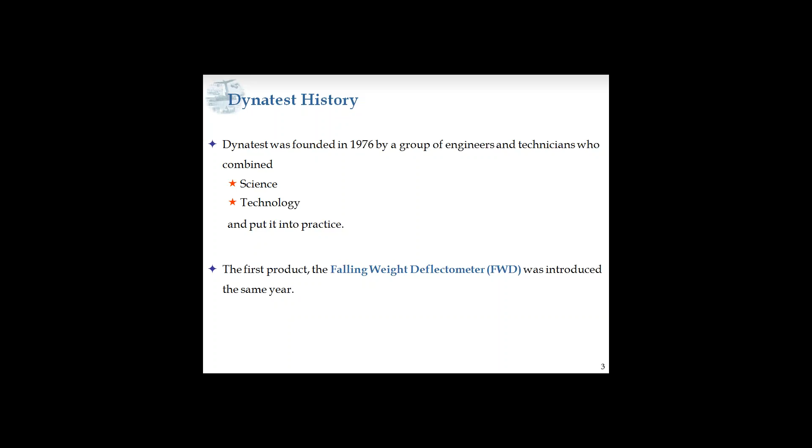It was manufacturing and selling falling weight deflectometers. That's where the company started, so it's been around a long time. Then it moved into different product lines, but the company is really based on non-destructive testing of pavements.

We are now global, and FWDs are on every continent around the world. We just opened up offices in Colombia, Peru, Chile, and we have several in North America. We're consolidating our production to Alpharetta, just north of Atlanta. We have offices in Denmark, now in France, Italy, and agents that sell equipment for us around the globe.

The focus of the talk is very basic stuff. I know you're all masters, PhD students, professors, with a gazillion years of experience, but Dynatest is interested in measuring pavement response, both structural and functional. For structural response, we're measuring deflections, strains, calculating stresses. We're doing that with our falling weight deflectometers and our heavy vehicle simulators.

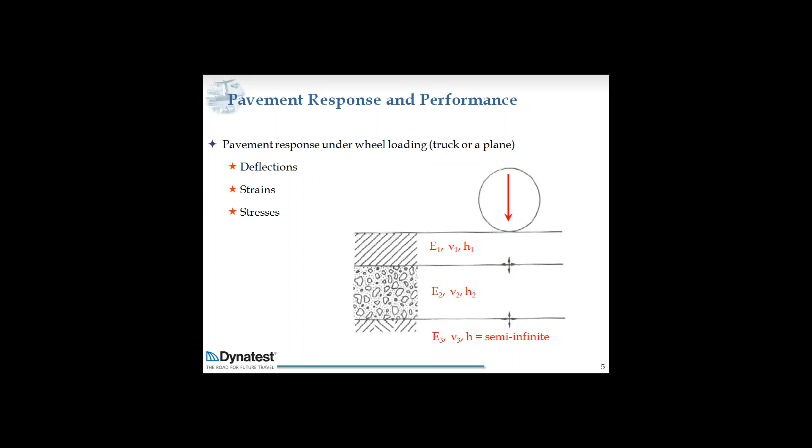For roadway pavements, falling weight deflectometers. For airfield pavements, bigger structures, heavyweight deflectometers; same thing, just bigger forces applied. Errol, you got to play with the lightweight deflectometer, the LWD that we had. So we're measuring pavement responses and correlating the response to performance: cracking, rutting, roughness, all that great stuff.

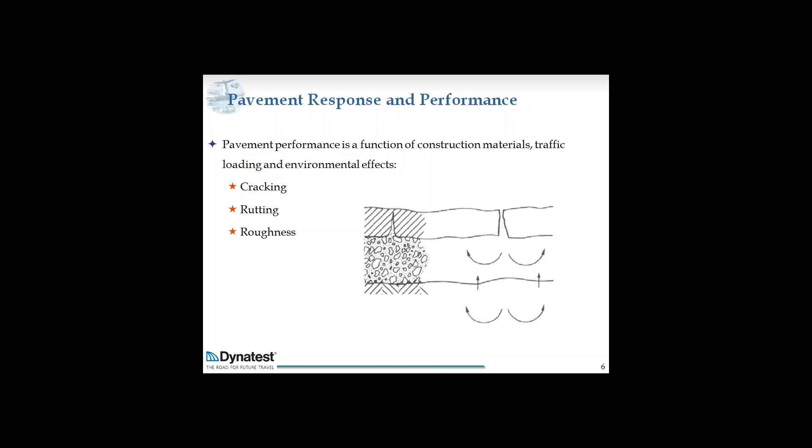From a functional perspective, looking at the surface of the pavement, we also test for friction properties with our friction equipment. We're also testing rutting, transverse profile, as well as longitudinal profile, IRI, roughness, that type of data. So the FWD measures structural performance, which eventually leads to functional performance issues as well.

APT historically has been performed using these big devices, heavy vehicle simulators or ATLaS machines, MLS; they produce these machines all over the place, with different ways of full-scale testing of pavements. These are expensive devices. Caltrans has a couple, Florida DOT has one, Waterways Experiment Station down in Vicksburg has one. These are $2 million plus systems. The one at the FAA is a $5.3 million device. These are very big investments.

Doing accelerated pavement testing, it's not just buying the equipment. You have to have a program, hire people to build test sections, get funding, and you put this big trailer on top of the pavement and run a wheel back and forth. You can control the lateral drift to get some wander, change the load, and put a profiler on the surface to measure permanent deformations.

While testing, you can also go out with a falling weight deflectometer, drop a load, measure deflection, see how deflections change over time, and calculate layer stiffnesses. You can also measure deflections in situ using multi-depth deflection sensors. So this is a very expensive investment, and getting a program off the ground is hard. We've sold 18 of these globally, but less than half of them have real vibrant programs.

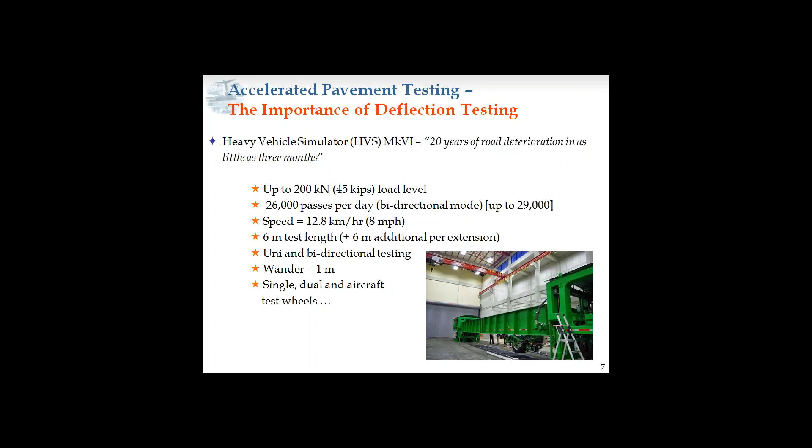So here's how you use the thing. It's got a wheel that goes back and forth, measures deflections, everything like that. You're probably all familiar with this. Why are we interested in doing this? Why are we doing all this testing? If we look at, I like this plot here. This is one of the few graphs that I like to show up here.

If we look at initial deflections when we do testing on a pavement, okay, so x-axis, number of load repetitions. How many times the wheel has been put across, or one load repetition, okay? So we're starting off at 0, going up to 2 million load repetitions, okay?

If we look at the elastic deflections under 9 kips of force at different times after the pavement has been subjected to those loads, you can see that D naught, initial deflection, increases to about 320% of D naught. In this test, it was around 650,000 repetitions.

Okay, but the deflections have gone from 320% D naught to 410% D naught. So there's not that much increase in the deflections. However, you're putting on a whole bunch more load repetitions. Okay, so what is that saying? Where's most of the damage to the pavement occurring? Well, structurally, it's occurring within this area up here, but then it's kind of hovering in okay shape through here. But right here is where you're seeing that initial increase in damage, and then things kind of even out a little bit.

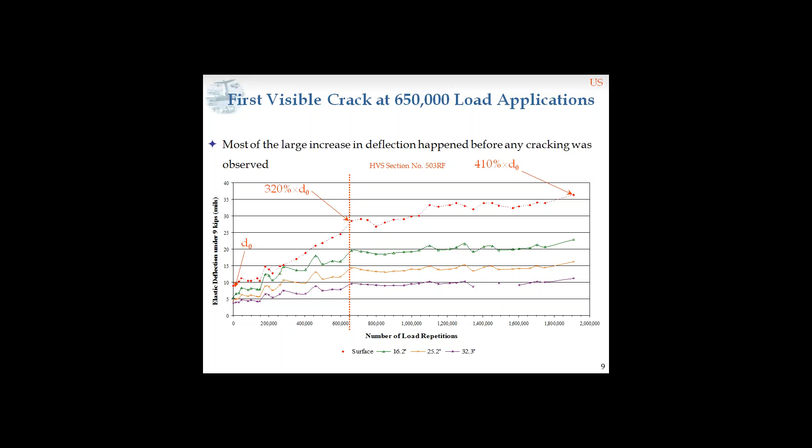So again, you can't bring an HVS out there to test every single pavement, so what can we do with a falling weight deflectometer? Well, here's the traditional Dynatest FWD. The setup is very, very simple. You have a mass back here, a bunch of weights. You guys will see these out in the field. They're just these little gray slabs. You can put as many weights on there as you can fit without messing up the machine. But put them on the back.

We raise the weights up in the air. We drop them. Okay, they come down. There's a load plate on the pavement surface. The weights bounce off of some buffers that transmit the load into the plate, and then from that, what are we going to measure? We have these little sensors on the ground. Does anybody know what those little sensors are? It's not one type of sensor, there are a couple different types of sensors that FWDs use.

Geophones. Okay, what do geophones measure? What are geophones measuring? Yeah, not deflections. We get deflections from them, huh?

You're integrating to get deflections. You're integrating from what to get to position? Velocity. What's before velocity? We're measuring acceleration. Integrate acceleration, get velocity, exactly. And then you get position, right? So we're measuring the accelerations. Some of these devices actually do measure velocity. And some other manufacturers, not Dynatest, will measure deflection directly. They'll measure position off of those. But we don't do that.

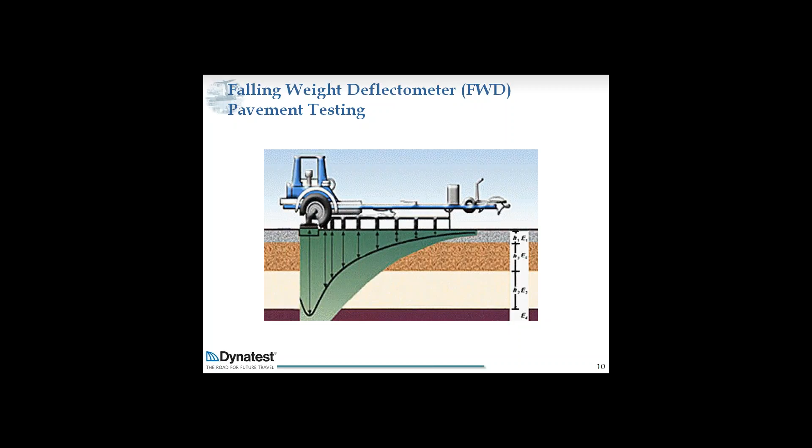You want to know the pavement layer thicknesses as well. So you do some coring, and that's why GPR is becoming popular now, because in order to get a good indication of what those layer stiffnesses are, you want to know the layer thicknesses, and it's expensive and dangerous to do coring all the time. So a lot of technology goes into finding out how stiff each layer is.

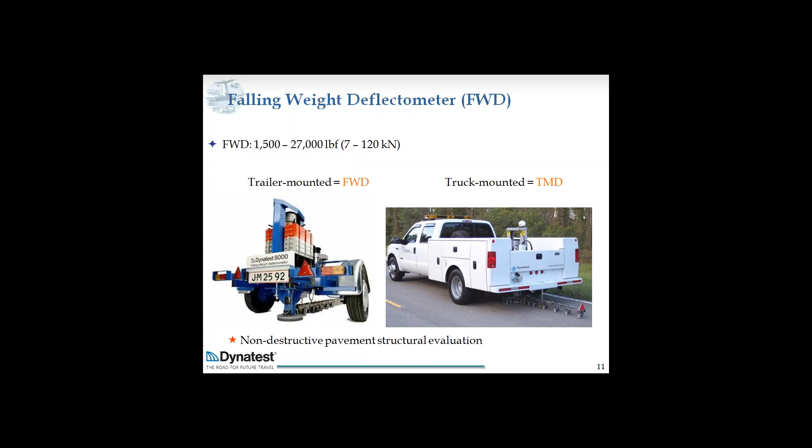These are the old systems. We have our trailer mounted FWD here. Again, we manufacture these assemblies in Denmark, so you'll see a lot of European license plates on these things. You'll see something that looks similar to this out in the parking lot. But since backing up a trailer causes jackknifing issues, and not a lot of people can do it well, myself included, we also put these in trucks so they're a lot more movable. Okay, so these are the traditional ones, and these were hydraulic systems. These are very different than the FastFWD, which we'll get to in a second.

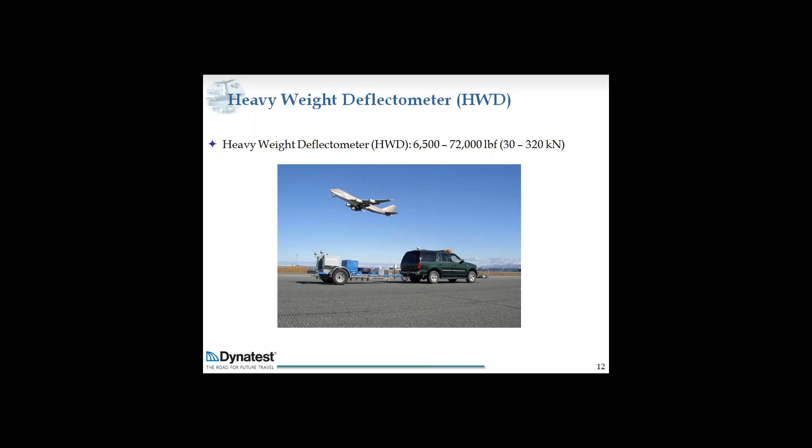But you see, this is a traditional heavyweight deflectometer. We have a huge hydraulic system, and this is for testing airfield pavements, a big hydraulic system to lift the big load package up in the back that we drop. I think this is out in Colorado. Might be Denver. Yeah, a lot of hydraulics back there. Hydraulics are always fun to work on when something goes wrong in the field. You got oil spilling all over the place and people are screaming at you. It's always a nightmare.

But the FastFWD, we've gotten rid of the entire hydraulic system. There are no more hydraulics with the latest falling weight deflectometer. It's a linear motor. It's 100% electrical. You can run them off a second alternator on a van, or you can run them off a generator. We have both hooked up out there. It's kind of cool. Super quiet. Do you run a drive screw? Yes, that's exactly what it is. Good thing we patented that.

So we have a DMI. Believe it or not, we're controlling the height of the load package with a DMI that's rotated horizontally, measuring rotations of the drive screw. And we know exactly where the load package is, so we get extremely precise measurements. It operates like a robot. It's incredibly accurate. So this comes up, there's a drive screw in here, and then we bring it up and we release it.

I really want us to get to the point where we can drive it, so we're getting more than gravity pulling down on that. If we could drive that and then control the load pulse with the driving force down, that's next year. But right now we just let it go. So this setup is really nice. It's very quiet.

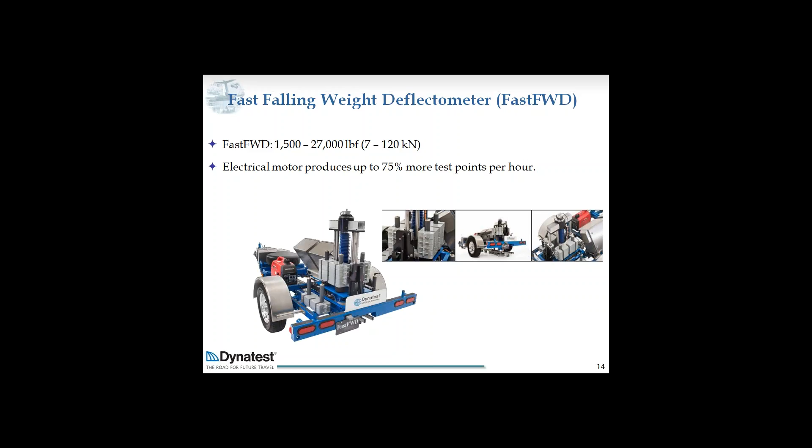One of the big things when you're doing this type of testing is how much time you're out there doing testing. So you want to limit basically any disruption to traffic. So you want to be on and off the road as quickly as possible, not just so you don't get hit, but so traffic or somebody doesn't drive into you. So on the roadway side, we're looking at being able to collect the same amount of data in a significantly shorter period of time. Conversely, if we want to get more resolution in data, or if we want to get a lot more testing done, we can do that in a shorter period of time as well. So there's some safety aspects to this thing which are kind of nice.

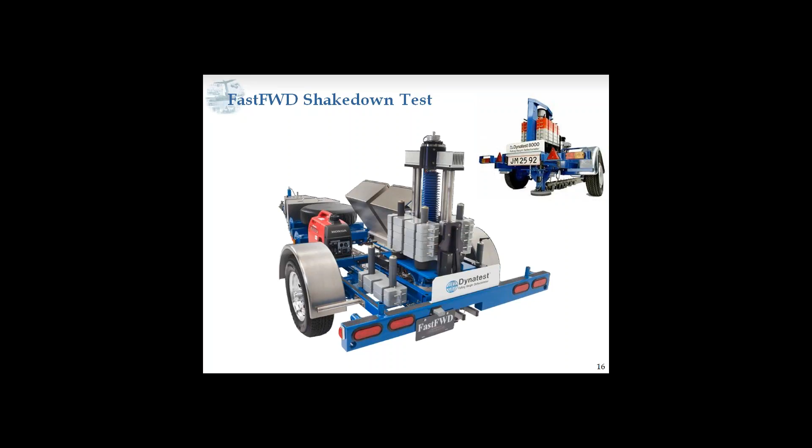Anyway, so here's the sub-assembly for the FASTFWD. So this is the screw and then the weight package, and we have these little locks that come out here, and you'll see all this stuff up close. Whoever wants to operate it, we'll let you push the button and start stuff. But it looks very similar to the original, to this FWD. You can see though that we had the hydraulic system running through here, and on either side here we had a support. Now we just have one centerpiece running through here.

All of these fins up here, that's to cool this electric motor that's up top. And this thing gets really, really hot. Okay? And that's one of the things we're still doing, field testing this to make sure that it doesn't blow up or melt down out in the field. When you take this to Arizona on a summer day, testing out there, it can be a bit of an issue. So we have a little umbrella that we put over it to keep it nice and cool, and a little fan. So anyway, here's what happened.

I said the consulting division were guinea pigs, okay? So when we get a new product and we draw it all up, we get it built, then we bring it out in the field and we start beating away on it. This guy, we took the FASTFWD and we literally strapped it down. We started testing. First, we didn't have it tied down.

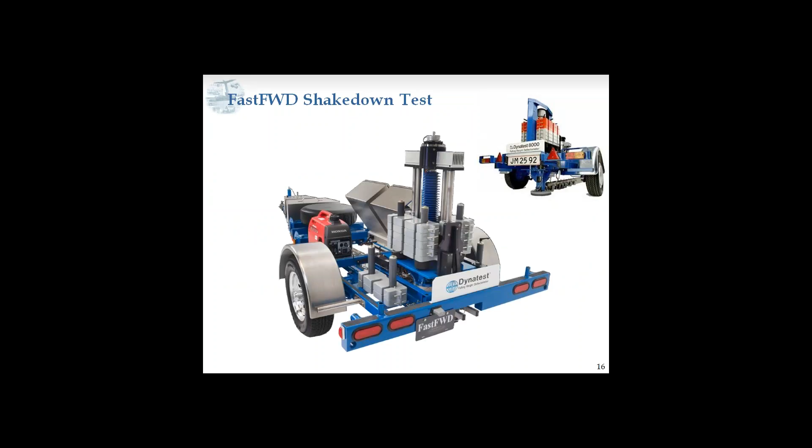And we started testing the same area, that same little piece of asphalt. We didn't even know what we had it on. We didn't start this off as a pavement testing project. It was an equipment testing project. But we noticed we're getting these deflections and deformations under the load plate. Like, what the heck is going on? And we're like, maybe we should measure these things.

So we start going out. We got a little rig with a laser profile, and we started doing some measurements. We're like, wow, we're actually watching the pavement deform. We're getting deformations out of this thing. It's happening really, really quickly. It's just going boom, boom, boom, boom, all day long.

And the first prototype, the first time that we were testing this, that little motor up top kept smoking, so we had to stop every 100 drops, I think. We had to stop and blow on it a little bit and then start testing again. And while that's going on, we start measuring some deformations.

And then some of you guys may know Per Ullidtz over in Denmark. Per is working with us still. He helped us develop CalME, California's version of the mechanistic empirical design guide. He came over and he's looking at this. He's like, wow, hey, this is kind of cool.

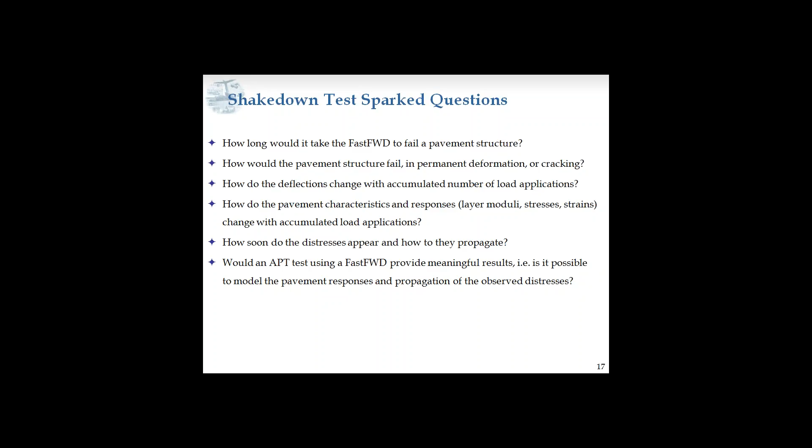So we started getting some of these questions, like how do distresses appear? All these things had been addressed by APT testing to some degree, but never with respect to an FWD. So we started thinking, wow, this is kind of APT testing. So we did 3 tests. One was not really a test. Test 1 was just a shakedown of the equipment, making sure it doesn't blow up. But we observed some stuff going on with the surface of the pavement. That led to tests 2 and 3.

We have a new production facility in Denmark, just outside of Copenhagen, a big warehouse, and beautiful concrete floor and everything, and they go in there with saws and they cut out the concrete floor and they put in a 5 meter by 3 meter asphalt test section. Okay, right smack in the middle of the warehouse. Oh, just broke my heart.

But they go in there, they put the fast FWD down there and they just start running it. Okay, and test 2, we did 96,600 drops at various load levels throughout the testing. I don't want to get into too many details. I can't spill the beans on all this stuff because we do have a TRB paper that we're doing on this stuff. So you will be able to get the full results and everything at TRB this year or next year. Started recording permanent deformations, and we even set up control points to measure outside of the influence of the FWD, of the fast FWD testing.

We did a set of 96,600 drops on the floor, and then I think, did they build a second test area? No, they just moved over a little bit. It just moved over a little bit. Okay. So, and then we did another test with 60,000 drops.

Okay, the graphs that I'm about to show you, do not read too much into these. They look all like, whoa, wow, that's really cool. Okay, don't believe it yet. These are very early results, and be suspicious. And let's just put it this way: they're going to be challenged. Okay, Per Ullidtz, we sat down. He started doing some models. He used some very simple models for determining permanent deformation based off of number of load applications. Very simple models. Okay, this is the first graph we saw.

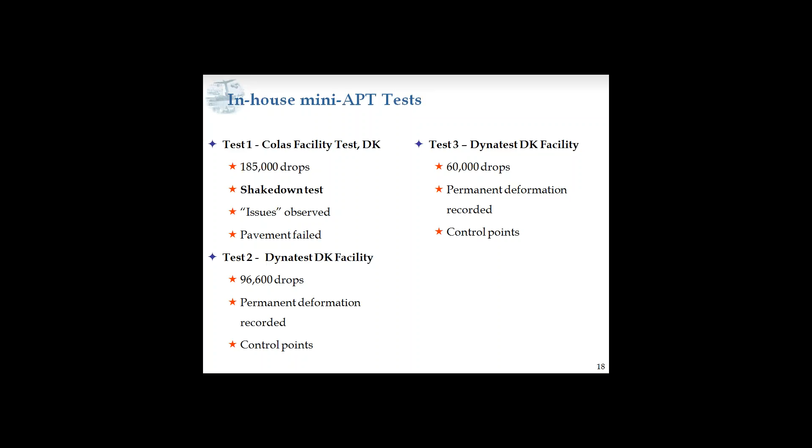So this was a DTU model for measuring permanent deformation that he calibrated, or he made some assumptions with, and this was based off the test section. This was the shakedown test. We didn't know that much about it. We knew it was 100 millimeters of asphalt, and then it was some sort of granular material. It was done in the middle of winter. The average temperature was ranging between 0 degrees Celsius and 4 degrees Celsius. It was not a controlled experiment or anything. It's terrible. However, he does a simple little model like this.

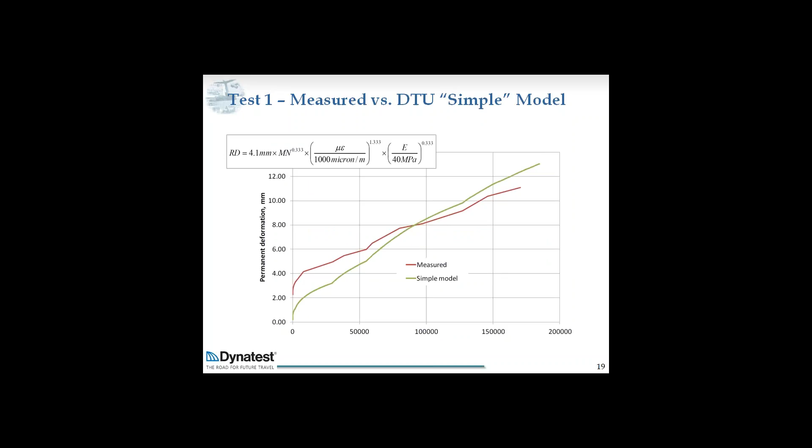Then this was test one. This was the one that was not designed. We didn't know what we were getting into with this. Test two, we start doing a little bit more design. We know what asphalt section is there. We have some idea of what the properties of the asphalt structure are. And then we start back calculating. So as we're going through, we're doing the tests, we're recording, of course, the deflections with the fast FWD, and then we're using our software.

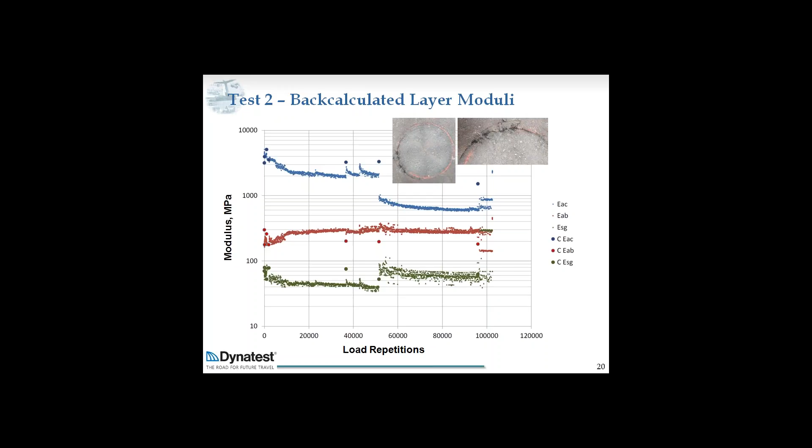So yeah, we're starting to see some interesting things with this. I'm trying to remember, do we know what the rate of testing was? How long it took them to get the 96,000? I don't know if we put that in. It was probably a month and a half, 2 months. Yeah, something like that. And they couldn't operate it all day because there's a condo building right next door, and it's really noisy. They're not happy at all with this.

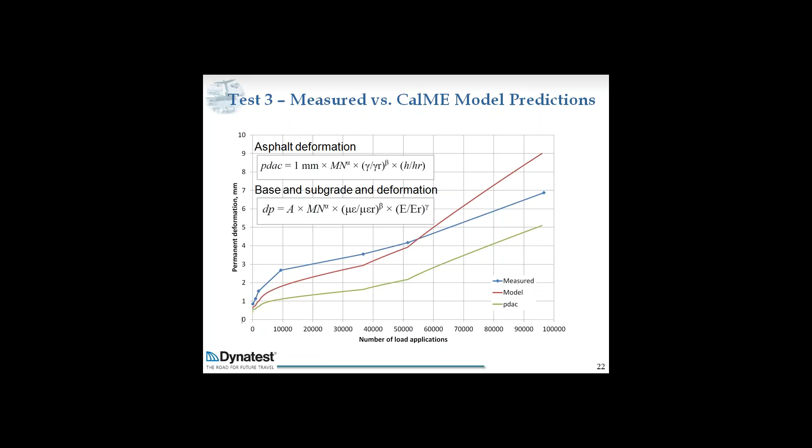And we're moving to start experimenting a little bit more with this internally. We're intrigued by what we might be able to do with this, where might this be applicable, and how might this be used in a practical way out in the field. You put a little Quonset hut over one of these things on a job. It's not that hard to envision where you might be able to use this, okay?

So conclusions, I wouldn't even call them conclusions. I'd just say it's still at an observational stage with all this work. But we can apply a lot of load repetitions really quickly with this, okay? That's a pretty decent rate of load application, even for APT testing. When you think about how many load passes you can get running an ATLaS or even an HVS, you're doing this very quickly, okay? We saw it fail in permanent deformation.

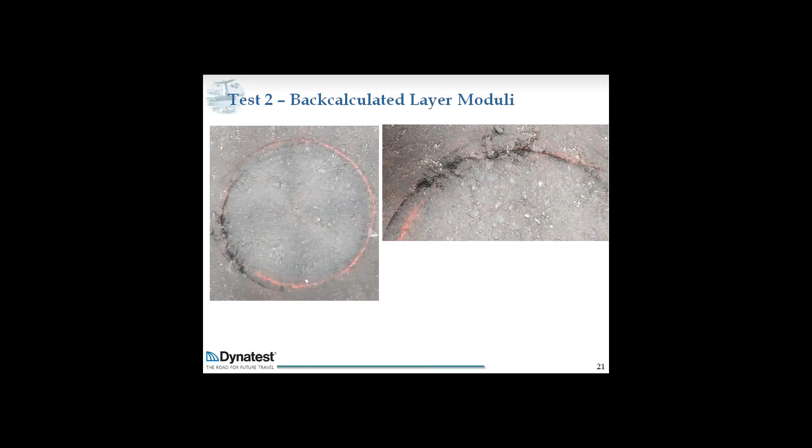We're not quite sure what to make of the crack. One of the guys said that he observed a crack in here somewhere. I don't think so, but there might be some cracking within the test area. The modulus values are performing as you'd expect, but there are some limitations. Having that concentrated load in the same place and just beating the heck out of it, that's not very realistic. It creates some issues with the data, so we need to maybe rethink that a little bit.

But it's kind of intriguing. We didn't expect to see this. We weren't looking for this. We just observed this and then went down this path.

So I think we're looking internally within Dynatest. We have our own R&D group. We have our consulting, our equipment, our service, and then our research and development divisions within the company. And so there's a lot of interplay amongst the consultants and the equipment group, and we all kind of make up the R&D team. But we're looking for ideas and, you know, where might this go?

You know, what might be the next best? What could we do with this? How could we investigate this more? And looking for insights from all you smart people who know a lot about pavements, and see where this might go in the future.

So I want to keep it very brief. I think we're at about 40 minutes with the presentation right now. I want to open it up to questions, but I also want to get you guys out in the field so you can see this thing in action. But at this point, what do you guys think?